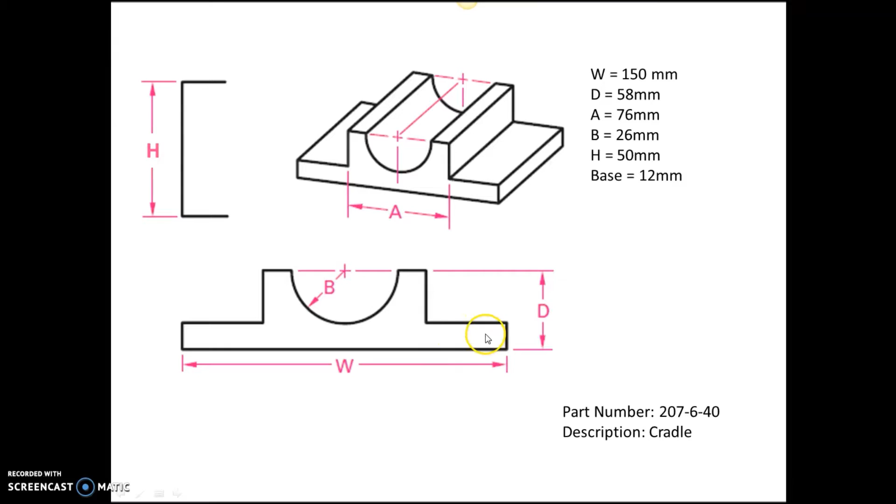Sketch. Click on this plane right here. Okay, let's start by doing this. We're going to click on, say, a rectangle. Just going to draw a rectangle right about here, like this. I'm going to constrain it using the coincident constraint and use the midpoint and the origin point there.

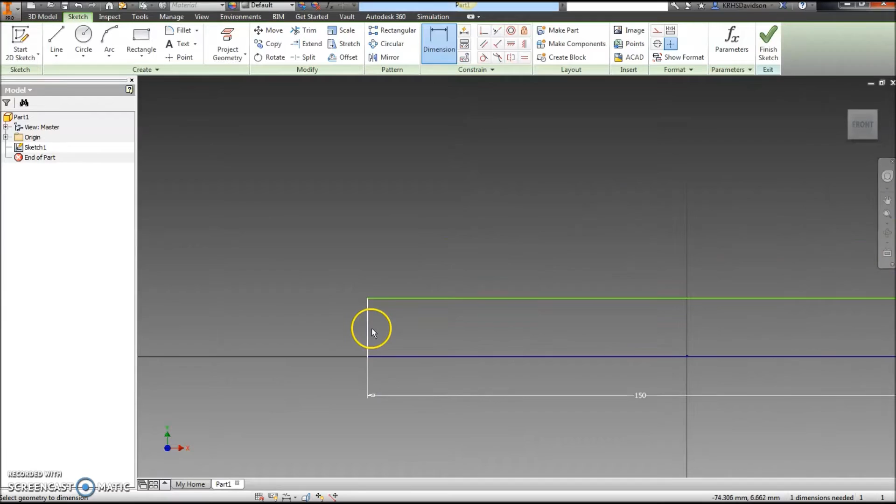I'm going to give it a dimension of 150, and give it a dimension of 12 here. Double click the mouse wheel, and we're going to finish the sketch. Double click the mouse wheel again, and I'm going to extrude it back the other direction, the total of 50, because that was the thickness.

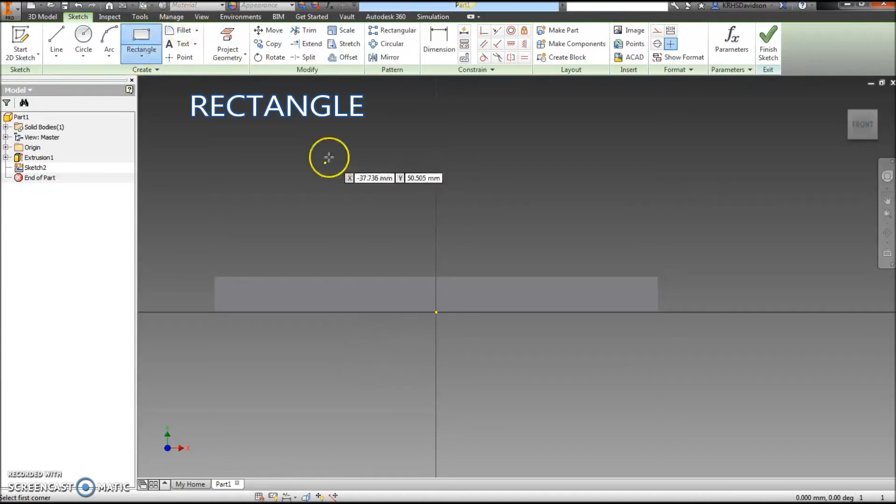Alright, so then I'm going to click right here on this, click new sketch. I'm going to draw another rectangle. Just going to draw it right about here like this. Do a coincident constraint between that point there and the origin point here. The height of this part right there is 58. The width across here is 76 - not 78, 76. And I'm going to finish that sketch.

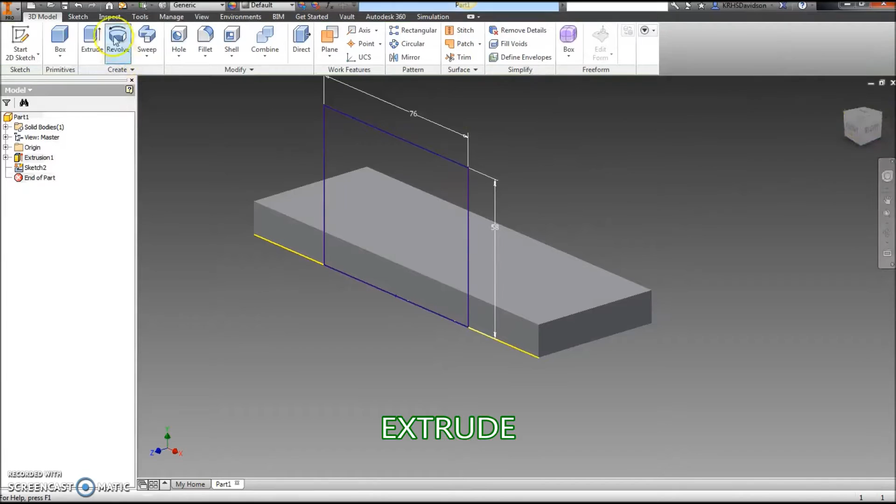Now this time what I can do is I can extrude it, and I can change this to extrude To, and say that surface right there. I'm going to pick that, and it goes all the way to the back. I don't want to cut it, so I'm going to click that right there so it adds it to it. And our numbers are correct now.

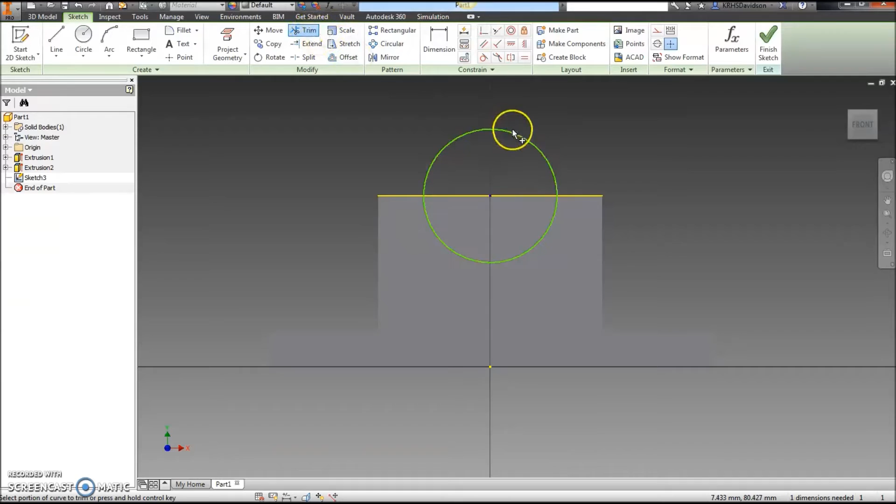Right click on this new sketch, click circle. I'm going to put a circle somewhere right in here. I want to make this so it's coincident with that center point there. I want to trim off the top of that - trim that, get rid of that part right there, and put this radius in there of 26. Finish the sketch and extrude it through that right there, so it cuts through always.

Alright, double click the mouse wheel, then my part is done. That's one way to do it.

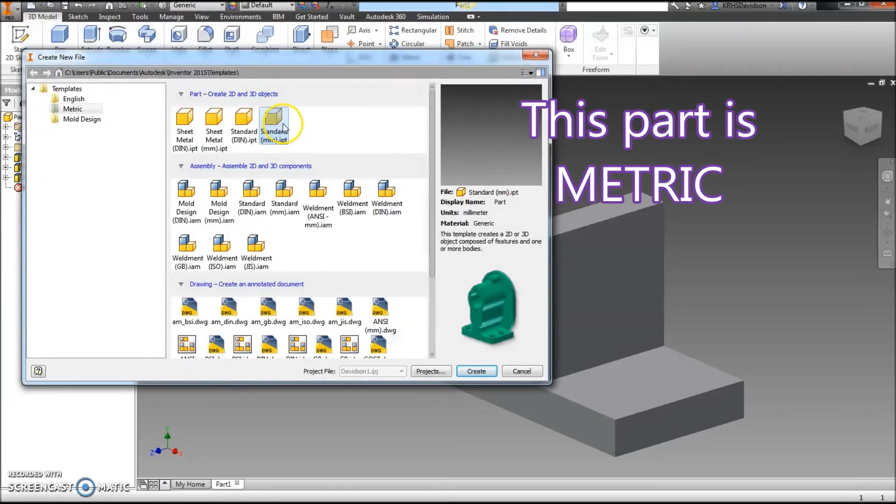Alright, we can go here and try to do this again. Do it a different way. Standard MM. You tell me if you think this is faster. So we're going to go here, and I'm just going to sketch the part. So I'm going to draw this, something like this here.

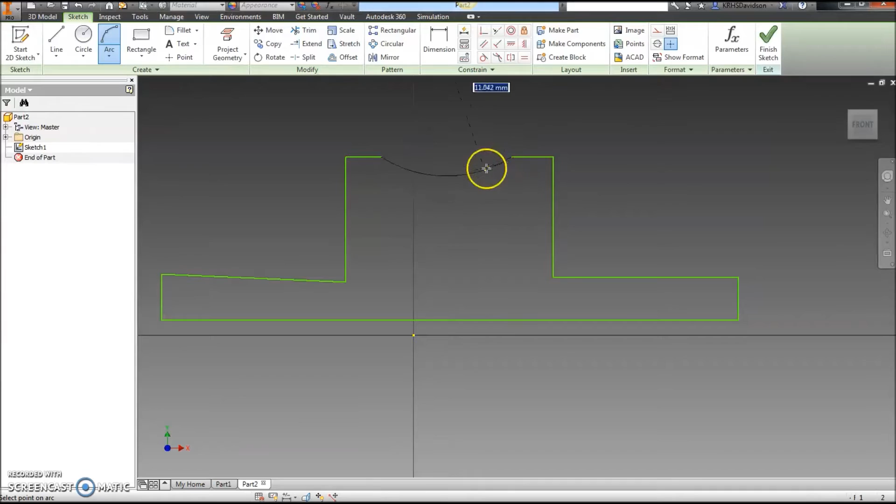I'll come over here, get rid of that. Alright, so I'm going to click that little piece out of there. I didn't mean to even put that there. I wanted to put an arc in here. So we'll put that in like this. Alright, so I've sketched it now.

So I'll do a coincident constraint between there and there. I want to do a perpendicular constraint and make sure that these are perpendicular at all times. This one and this one are supposed to be perpendicular. So that should straighten it all out. I'll do an equals constraint, say that this one and this one are supposed to be equal. This one and this one are supposed to be equal. This one and this one are supposed to be equal at all times.

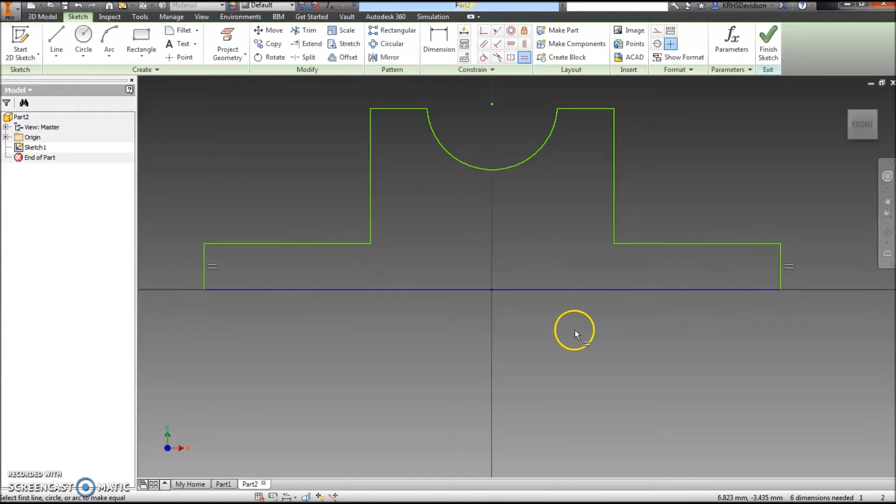I will do a vertical constraint right here from that into the origin point, and I'll do a horizontal constraint between the center point there and the midpoint of that line right there, so that puts it always in the right spot. Now I've sketched, I've constrained, now I'll dimension.

I'll put this one on here and make this one 12. Makes everything bigger. Zoom, double click the mouse wheel. Oops, now I'm really messing up the mouse wheel.

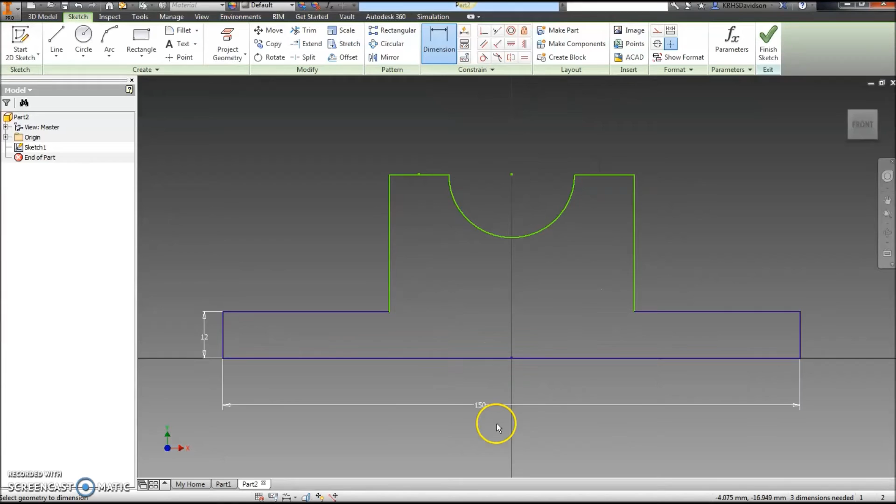I'll come down here, put this one on as 150. Put this one on from here to here as 58. I'm going to double click this one just to make sure, because it's not exactly right. I want to make sure it is 150 - not 152, 150. I'll do a dimension across this to say that it is 76.

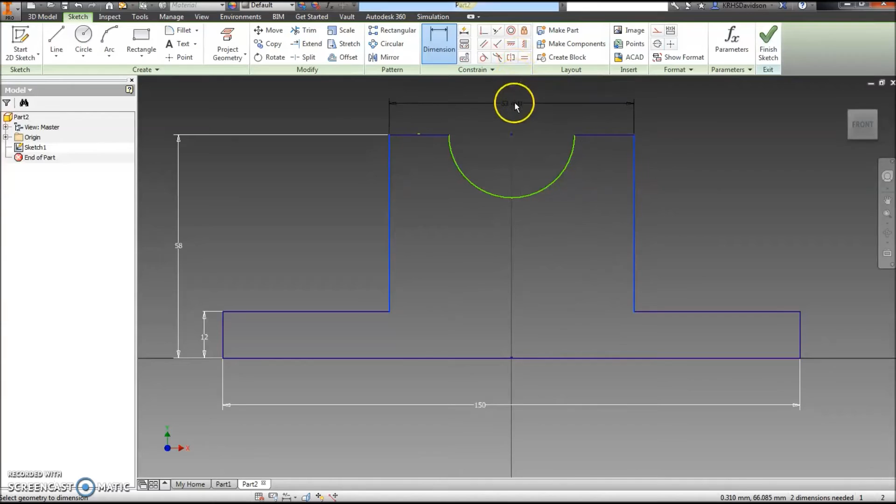And put a dimension on here to make that one, 26. And once I get that done, I can finish the sketch, double click the mouse wheel.

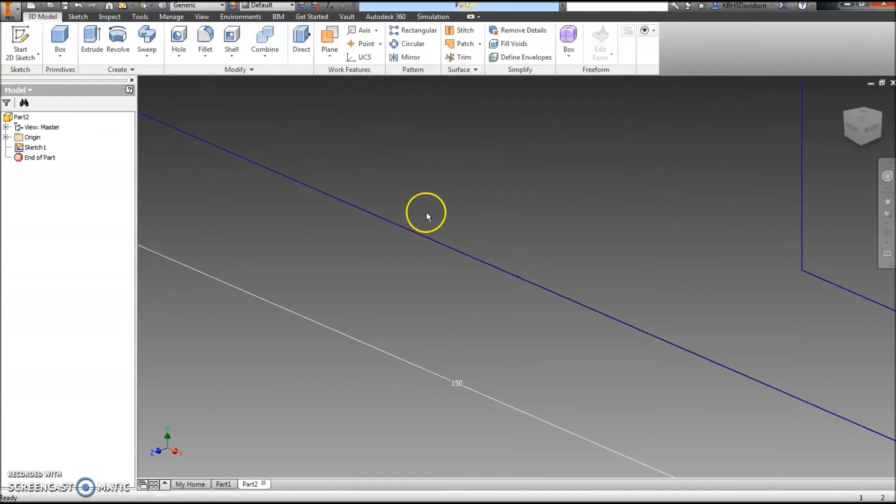Extrude back that way 50. So I've got two parts, should be identical, one way or the other.

So either way, when I'm done, you want to click save. You want to save it as the part number, and we'll call it 207-6-40, and it is the Cradle. Alright, so we can call it that. Save. I'll go ahead and overwrite the one I already had done.

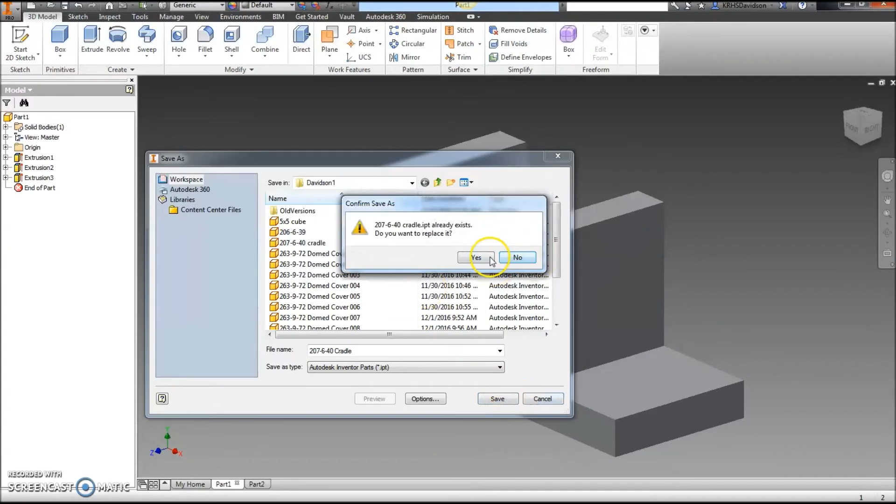Go up to the application menu, come down to New, click on New. Don't click that one, but come down here and click on the one that says ANSI MM IDW to create the drawing. Then click Create.

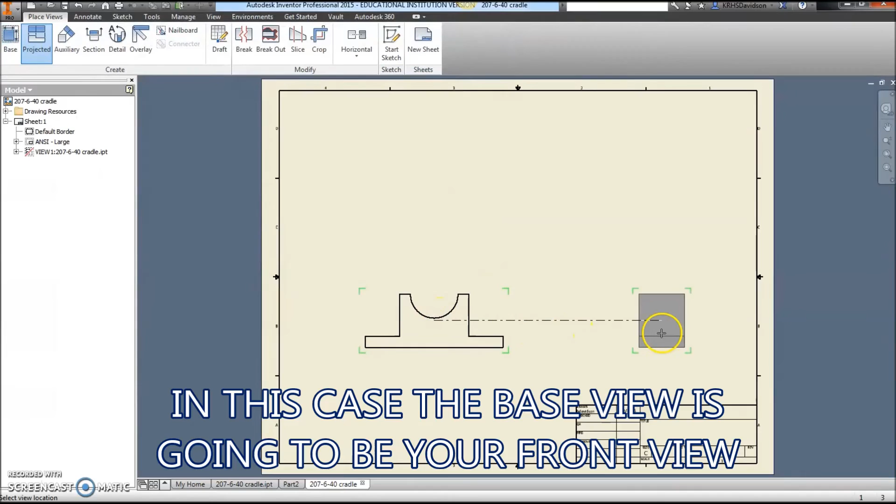And then the drawing comes up. Drawing page comes up. Click Base to get the base view to come in. We'll put this view right here as our front view. Put a view right here, view up top, and put an isometric in, though it does not need to be there. Right click and create.

Next thing we'll do is we'll start annotating by putting in the center lines here. I'm going to do a center line bisector across these, so that makes that easy to find.

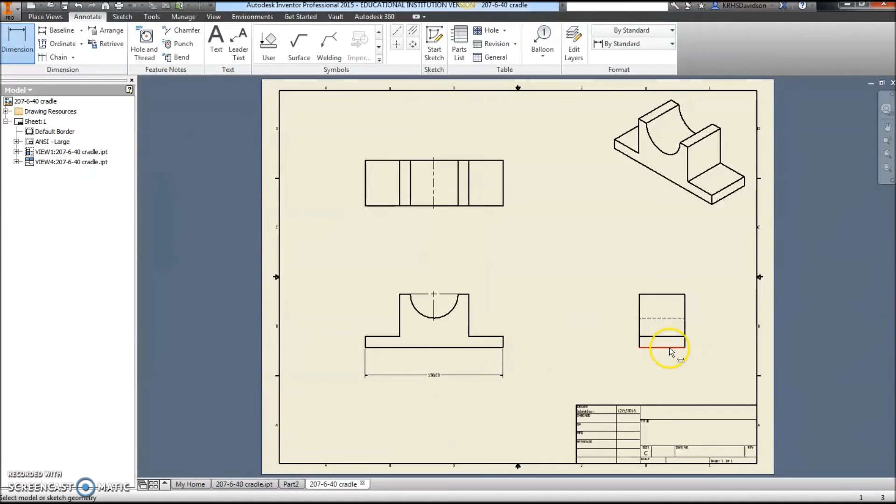I'll do a dimension here that says that the overall length of this is 150. The overall height of it is 58. The overall depth of it is 50.

Then we can start doing other dimensions, and I'm going to put a dimension that goes from here to the center of it to tell me how far off that is. I probably want to add one that says from here to here, what that dimension is, and I need to know how far over this is.

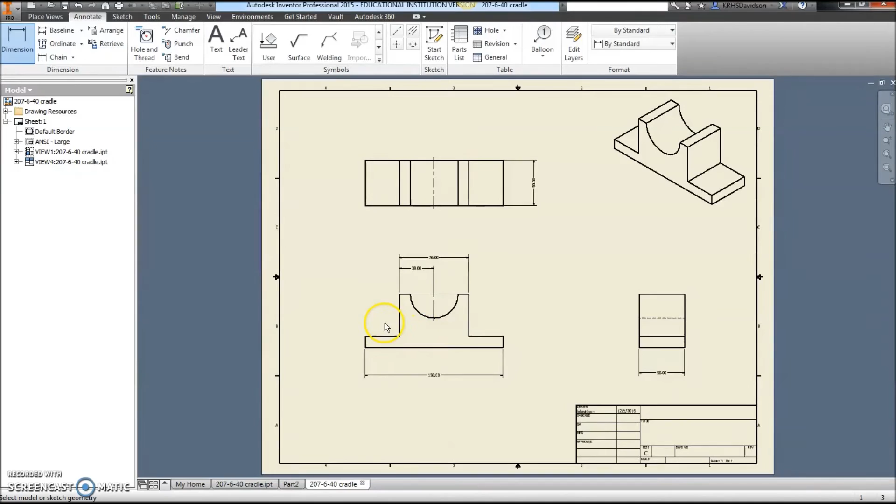Even though we know it's centered, your machinist is probably going to want you to put one in that says it's from here to here, what dimension, and we'll just add that right there.

Alright, the only thing left is to add a radius right here to tell us how big that radius is through there. Oops, I'm sorry, that wasn't the only thing left. We do need to add 12 millimeters right there.

And we also need to have an overall height, which we can add right here and here. I don't know what I was thinking a minute ago. This width right here and this are the same one, so we're just going to click OK and delete that.

I'm going to hit escape a couple times with the keyboard, hit delete. I don't need that one there. So now we've got the whole thing finished.

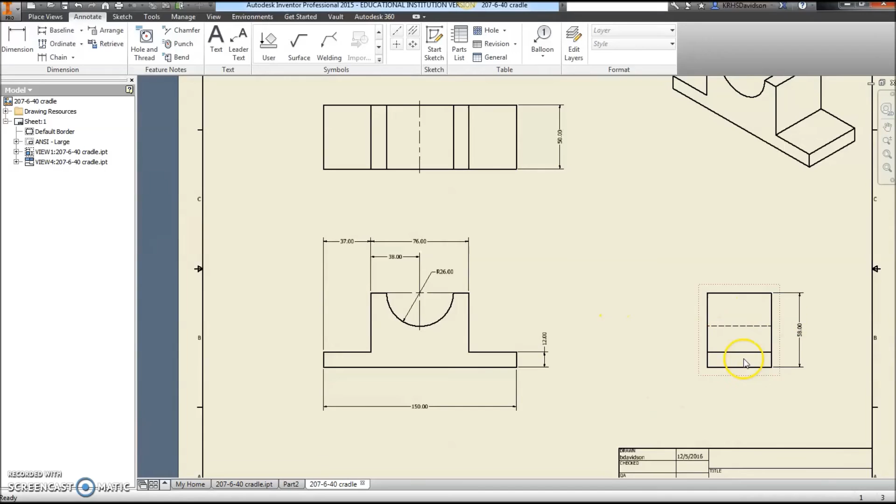We can go in here, the application menu, go to iProperties, go to Summary, put in the title, all caps, Cradle.

Company name is your high school name. Whatever your instructor tells you to do.

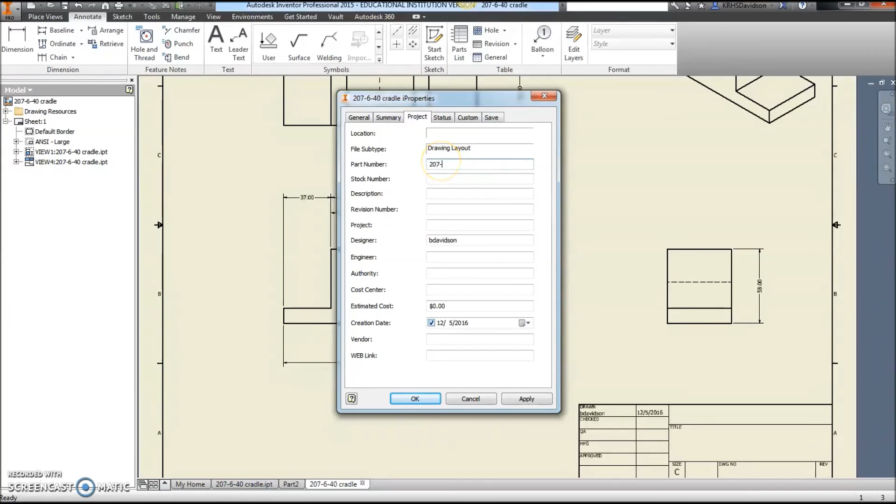Part number 207-6-40. Then click Apply and Close.

Everything should be done. Double click your mouse wheel, go up here, go to the application menu, come down to Export, click PDF. I can overwrite the one that already exists.

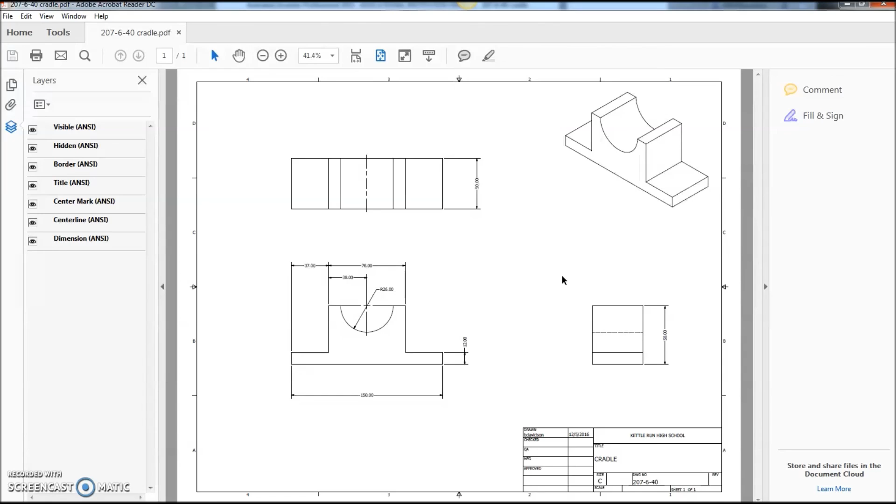It should come up just like that, and this is what you submit to Blackboard or whatever other program you're submitting them into to get a grade. It has to be a PDF file to get a grade, so submit the PDF file only.